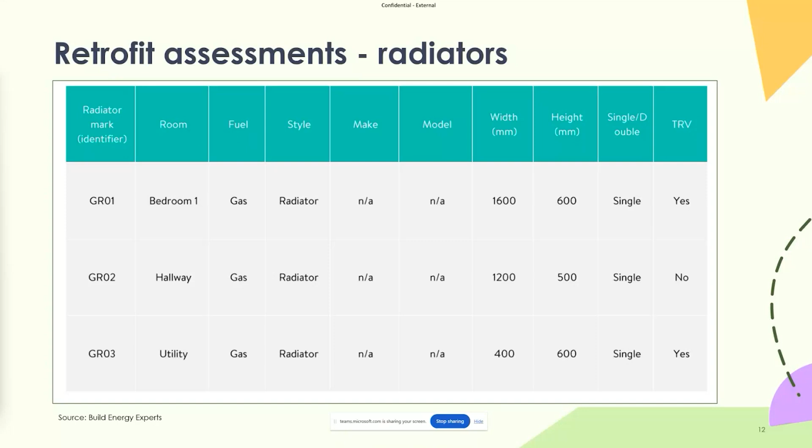Because if you can just switch a heat pump out for a traditional gas system and keep the plumbing system, then brilliant. It's not going to be that expensive. But if you have to switch the whole plumbing system, it's going to be a lot more costly. So make sure those radiators are identified, which room they're in, their size, single, double, so the output can be predicted for the heat pump design.

Furthermore, floor plans, when they're scribbled and poor quality, it's really hard to coordinate design and energy model from. So they should be clear, ideally to scale, or if not, just really clear. And they should identify the elements like the individual windows, their location, the radiator location, the different lighting, etc.

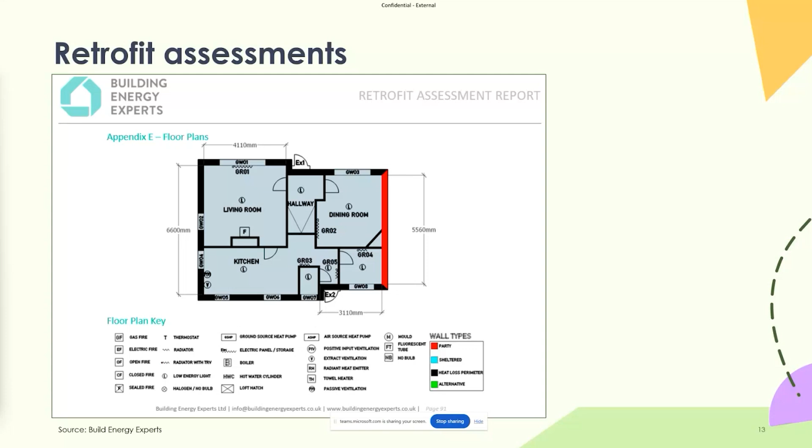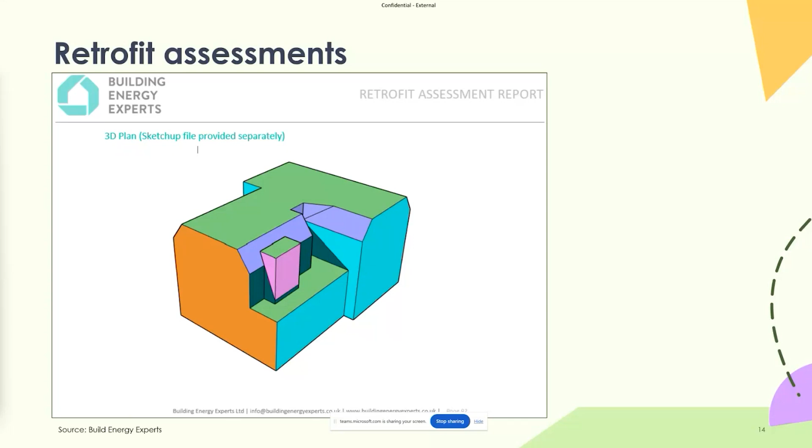We also like to provide 3D models to our clients, or to our coordinators if they're doing the modeling, because there's no replacement for being on site and having experienced the building. So if somebody's identified all the different building envelope types like this, it makes modeling way quicker, way easier. You get way less questions back from coordinators or modelers.

So on to air tightness testing, which is one of our specialities. One of the frustrations of air tightness testing in the previous waves is that it's just been blanketly applied, often because they've fallen into the old pathways of Pathway C, because it's over 30 projects, and none of the measures which are being installed are actually air tightness applicable. So it's a waste of money, really, because those tests just get done. Those certificates never really get looked at. They're just simply lodged with Trustmark for a tick box exercise.

But when done properly, it's one of the most effective tools. And the good news is, in wave 3, there won't be the pathways, and the blanket air testing requirement has been removed. So it's now only necessary if your measures affect the air tightness, so you're changing something in the fabric, or if you're setting an air tightness reduction target. Developing an air tightness strategy is now a requirement for everything, but that doesn't mean you have to test it, which I think is a sensible change. This should result in fewer pointless tests and the more effective use of air tightness data.

Pulse testing has kind of become an industry standard, and a lot of people seem to think that it's superior to blower door, which isn't true. Pulse testing is a great new technology, and it's really good, but its main benefits are it's less intrusive, it's quicker, and it's easier to perform, so you can be in and out. It's not more accurate, although it is fairly accurate, but blower door is still far superior in terms of your total outputs, because it's a far superior diagnostic tool.

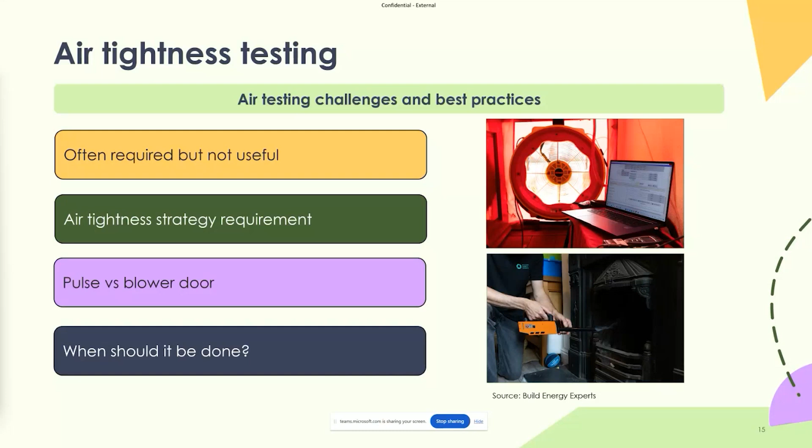So you'll be depressurizing the house, and you can either use your hand, or you can use, like in this photo, a smoke machine, or we use thermal imaging as well to identify where all the air leaks are. And if you're using blower door, it enables you to produce detailed air tightness reports. If you just receive a certificate and you're a designer, you're like, great, it's got a really bad air tightness score, but I've got no idea where it's leaking. So if you're using the blower door depressurizing, and the tester is trained, they can go around using a range of techniques to find out where those problems are, identify them with an image, mark it with red lines around there, and have a description of it, and what the best solution to that is.

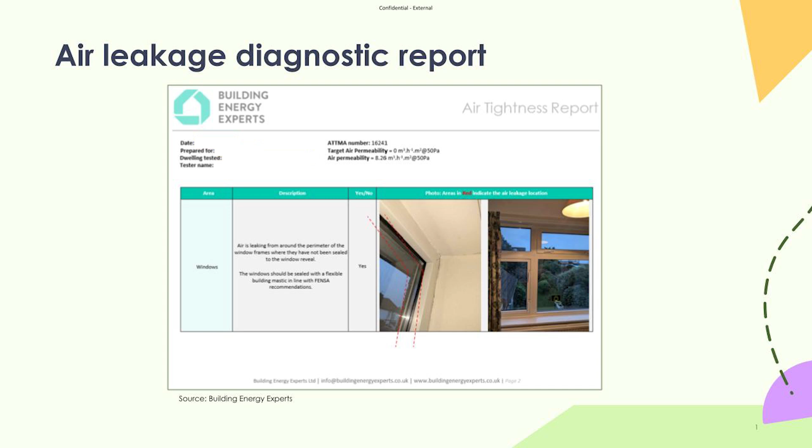Part F ventilation testing is possibly one of the least understood and enforced building regulations. It's been a requirement for 15 years now, but people are only just starting to work out what it is. It's a requirement of PAS 2035. It's a BS 40104 requirement, and it's a building regulations requirement if you're doing any major works to a building that will affect the ventilation. Very few assessors are testing flow rates, and those who do often lack proper training or calibrated equipment. The correct assessment requires a competent person, ideally with the domestic ventilation competency training, with a calibrated anemometer or flow hood, or a calibrated balometer, which is that equipment in that photo there.

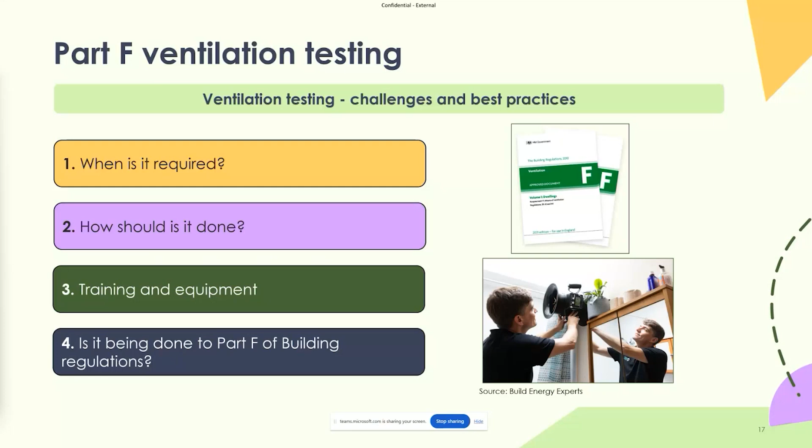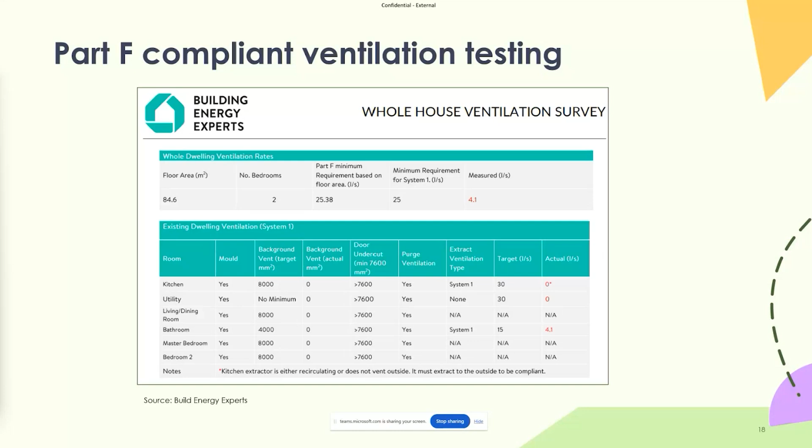Furthermore, if you are assessing the Part F, quite often it seems people are just testing and getting the flow rates, whereas a true Part F ventilation assessment goes beyond that. It's not just a simple visual check or a test of the fans. It requires flow rate measurement, but also measurement of trickle vents, door undercuts, and verification of purge ventilation to ensure the whole building is compliant. This is an example of an extract from the Part F section of our reports, showing the targets of the flow rate, whether the ventilation is present, if there's purge ventilation, the system types, if it's DMEV or just a simple extract system, your undercut size, etc.

Next, thermal imaging. Thermal imaging can be done very badly. It's often because it's put on a tender process and people want to go to the lowest score, so they're just putting in like 100 quid for a thermal imaging survey with an iPhone attachment, done at the wrong time of day, with very low resolution. These reports aren't particularly useful. They're not often done by anyone with any training. They're not tuning the photos to make sure they're all done to the same scale. And poor thermography reports end up in people taking the wrong conclusions from them, which is counterproductive essentially.

So accurate results require qualified thermographers with high definition cameras, and to do it in the correct conditions as well, which is there needs to be a 10-degree temperature differential, so it needs to be within the winter months; from October to April is sort of the maximum of the window. Commissioning them in the summer or spring is kind of a waste of time.

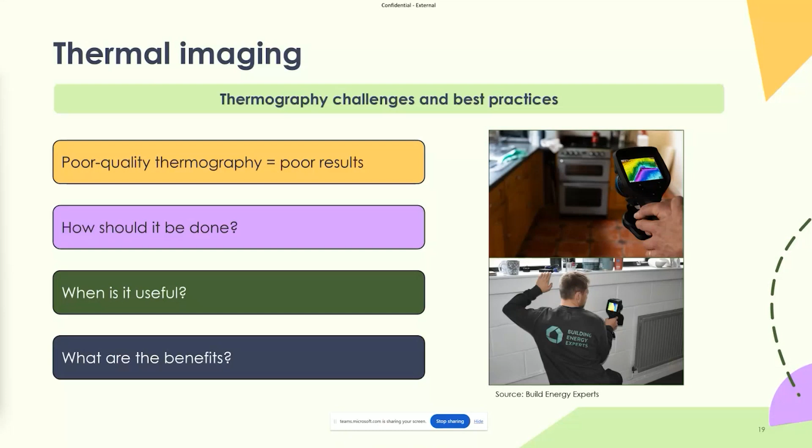With high definition thermography as well, you can also use a technique called thermal indexing, where you take the internal temperature, external temperature, the temperature of the surfaces, and you can use it to calculate and show all of the areas which will have a condensation risk because they're below the dew point where condensation will form on them, and therefore you can predict where condensation will form and black mold before they do.

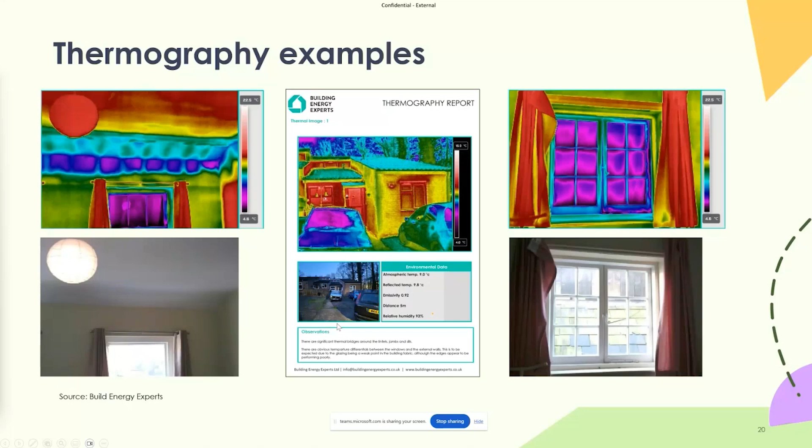And thirdly, on the right, there's a window, and this shows the advantage of high definition, because around the edge you can see it's very fuzzy, and that's clearly an air leak as opposed to a conduction heat loss element. So the high definition enables you to differentiate between air leaks and general heat loss.

Finally, borescopes. They're a really important tool. There are challenges with flats or drilling locations sometimes, if it's a mortar and you might be concerned there's some pipe work or wires behind it. But other than that, if it can be done, it should always be done for cavity wall properties with the retrofit assessment, because it really speeds up the whole timing of the process. Because if it comes back as a retrofit assessment with a cavity wall assumed unfilled, then cavity is going to be a really cost-effective and easy measure to install in the fabric first hierarchy. So you're going to just be sending someone back out, so it's just going to delay the whole process.

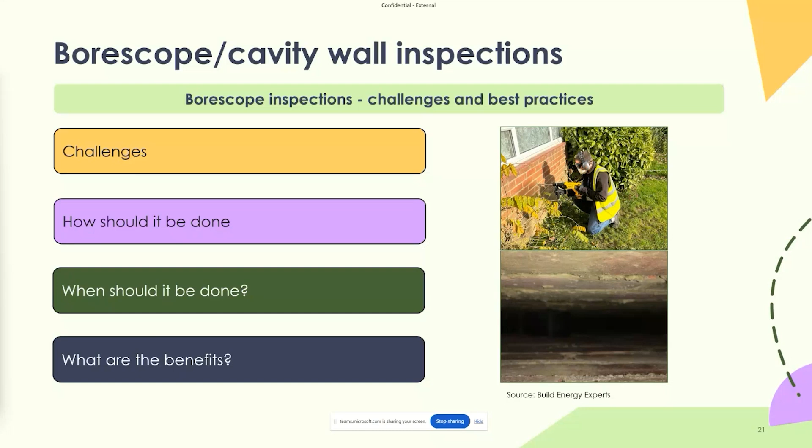To make cavity wall reports useful: quite often you just get a bunch of images in a folder which don't tell you where they're from or anything about them. They need to be put into a clear report showing exactly where the drill holes are, and the different elevations, the type of wall, the cavity thickness, and also labeling the individual images, matching them to which elevation they were taken from. This means that they don't have to go straight back, because what usually happens is delivery partners just see a bunch of photos and go, right, we need to go straight back and do a proper cavity wall inspection, because we're not really sure where any of these match up to.

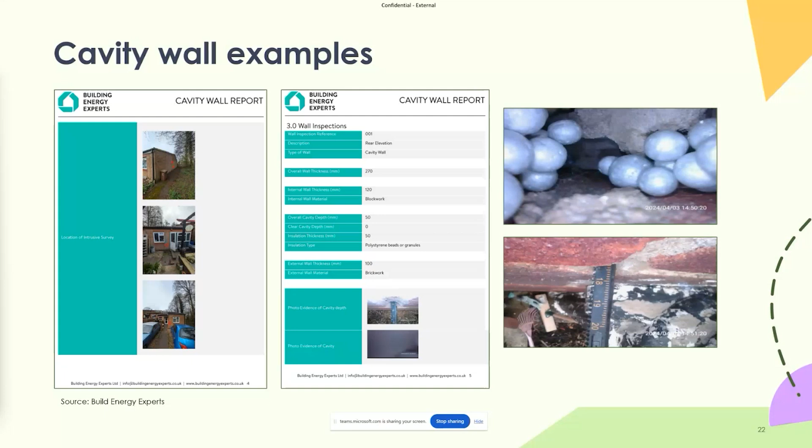Right, now we're going to cover a bit about surveys in a grant funded scheme. Understanding grant funding, essentially the retrofit assessments can be covered in either box, the administration and ancillary, or the capital costs, which enables you to be more flexible and essentially invest in high quality RAs to start projects off on the right foot. Also do new EPCs in the A&A.

EPCs are quite often incorrect because there's been a loft insulation scheme or a window scheme that hasn't been documented since the initial data used for the application for the grant. So you get there and it's a low C or a high D. It doesn't really make sense putting it into the scheme. And then in terms of the capital costs, the air testing, ventilation, SAP, and the other PAS costs, assessor and coordination costs go into that as well.

Right. Now we're going to do a quick overview of some lessons learned from previous waves from a PAS perspective. Essentially, in this scheme, compliance with PAS ensures quality and ensures that you get the funding, but sometimes it can prove inflexible and tricky to navigate and frustrating, especially for the delivery partners. So it's best to have an overall strategy and make sure you stick to it.

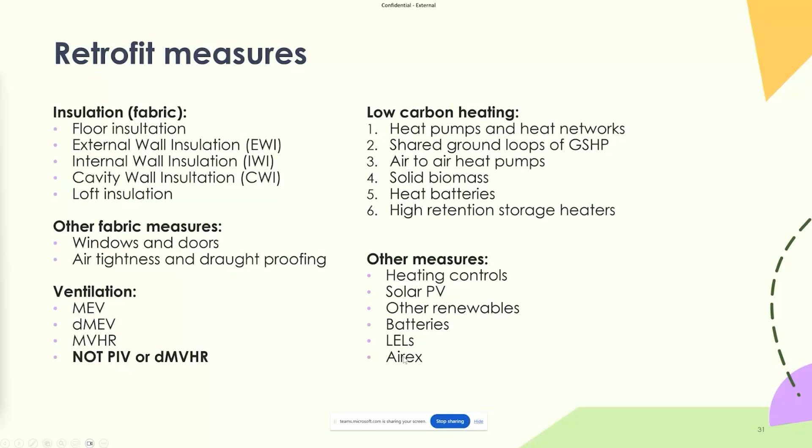I'm conscious of time, so I'm going to move on.

Retrofit measures lessons learned. Essentially, thorough site visits, communication and resident engagement are crucial at the beginning, and consistent communication through the project, keeping tenants involved in the process, ensuring they're on board with all measures, even if they're hesitant at first. Resident engagement is important in understanding the scheme's intended outcomes. If you can run events and show tenants the benefits, if there's a property nearby that's being retrofitted, and get them to speak to other residents so they really trust and get bought in, then it's always going to be a lot more successful.

Also, another thing on ventilation, just make sure ventilation is considered at every stage, because it is one of the key complaints and problems with black mold and condensation coming through. And also it's one of the horror stories often projected in the news, that any sort of eco measure causes black mold everywhere, where it doesn't, if the ventilation is correct.

Right, in terms of measures, it's always going to be a balance of energy efficiency, cost, practicality, and thermal comfort. It's about finding the sweet spot where you maximize the energy savings without breaking the bank, while also considering how these measures affect the comfort and usability of the building. Get independent advice if you're using a turnkey solution. Use a critical friend to assess the measures' value for money. Some people just aren't used to new measures, even if they are really good, so they'll be hesitant about it. But they can always be informed and helped with it, as long as there's good designers and coordinators.

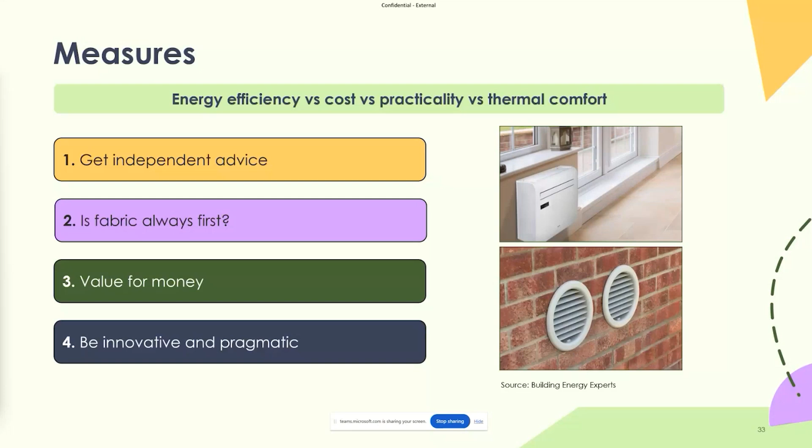On the right, it's just a new system that I saw recently, which is an internal-only air source heat pump, which I thought could be a really useful technology, especially in flats and properties with limited external space.

So now we're going to go through a few delivery tips. Focus on communication, timelines, and managing client expectations. Engage professionals and delivery partners as early as possible, because they're going to get booked up, especially as soon as the funding comes out. They get booked up really quickly, and you'll end up paying more for less experienced people.

So really engaging with them and getting their understanding of your stock, letting them know what you want to achieve early, and getting them booked in is key, and making sure there's ongoing dialogue with all stakeholders, so that this minimizes the disruption.

Delivery partners can often get a really bad rep, and some of them don't do a great job, but a lot of them are really trying hard. And if they don't have a really clear plan, they don't have a brief, and they're getting that information really late, it is a really hard thing to coordinate. They're coordinating a lot of people to come together in a single week to deliver measures usually, without disturbing people whilst they live there, because residents are pretty much always staying.

And from a resident's perspective, the works can be really disruptive. So just make sure they understand as much as possible the benefits that these are bringing to them, and that this really is a scheme to help them, not inconvenience their lives.

And the last element is providing realistic timelines, making sure the tenants, everybody knows how long it's actually going to take, planning for delays, because ultimately some things will come up, and there's always going to be a deadline to get all those things in and all that evidence in and get the works completed, because there always is with funding.